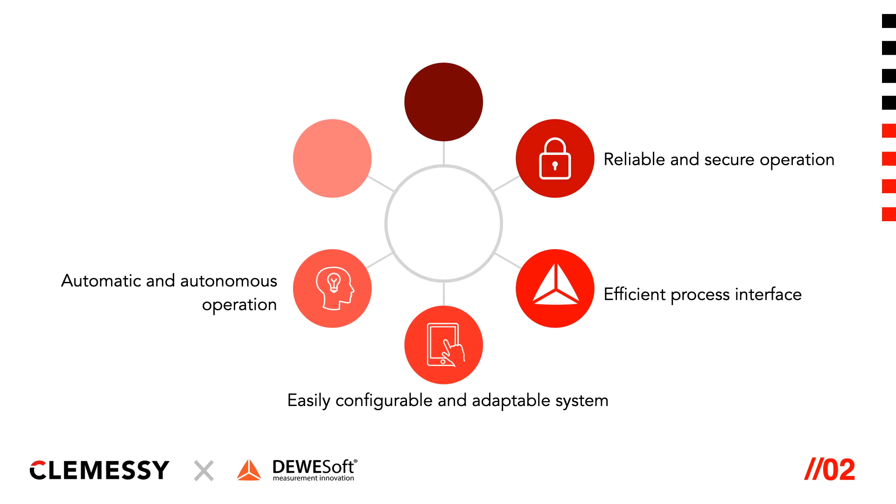Then, you will need an efficient process interface, able to acquire data with fast sampling and fully synchronized. An easily configurable and adaptable system will be the third key point to perfectly fit with the operation you want to perform. In order to limit the risk of error and make the process more reliable, it is essential to have a system capable of operating autonomously and automatically, but with the possibility of manual intervention from the operator.

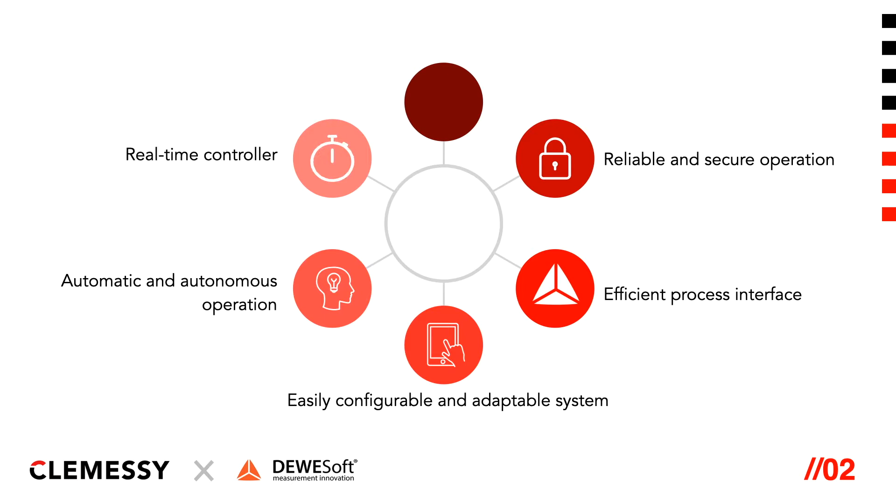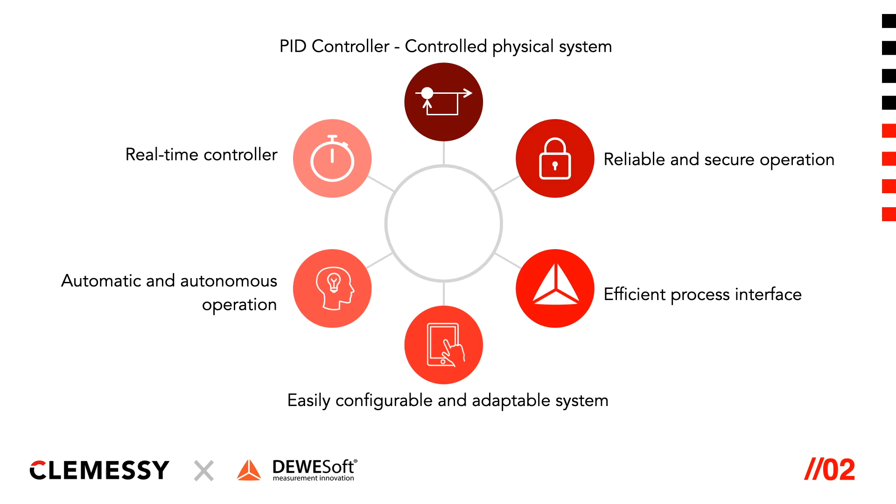The use of a real-time controller is also one of the keys to accuracy, as it ensures the respect of time cycle constraints and the expected accuracy of the process. Finally, at the crossroads with automatic and autonomous operation, we could also implement a real-time PID controller, as it automatically applies accurate and responsive correction to a control function between the set points and the measurements.

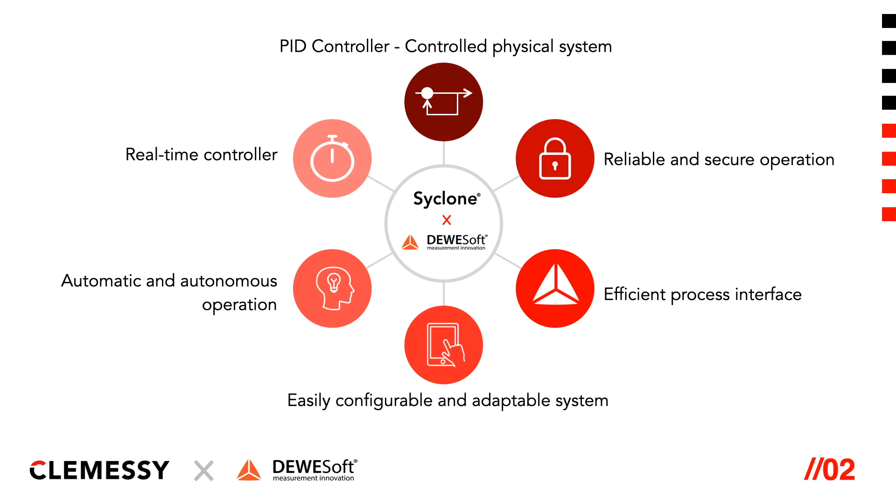All these requirements could be fulfilled with the combination of Syclone and Dewesoft solutions. As you attend this event, you should be familiar with Dewesoft solutions, so I will just give you a quick introduction to Syclone, which is CLEMESSY's supervision solution. This will give you a better understanding of how we combine the world of data acquisition and supervision with Dewesoft.

Syclone allows the supervision of industrial processes. It's an efficient solution for developing control command systems, from industrial automation to control benches for spatial launchers. How do we adapt to these very different needs?

Syclone is a modular software toolbox that allows building a fully customized solution, from simple to the most complex system. It includes human-machine interface, operation sequencer, SCADA, real-time controller, data acquisition, and also a server. Each software module has dedicated functions and can be adapted to specific needs.

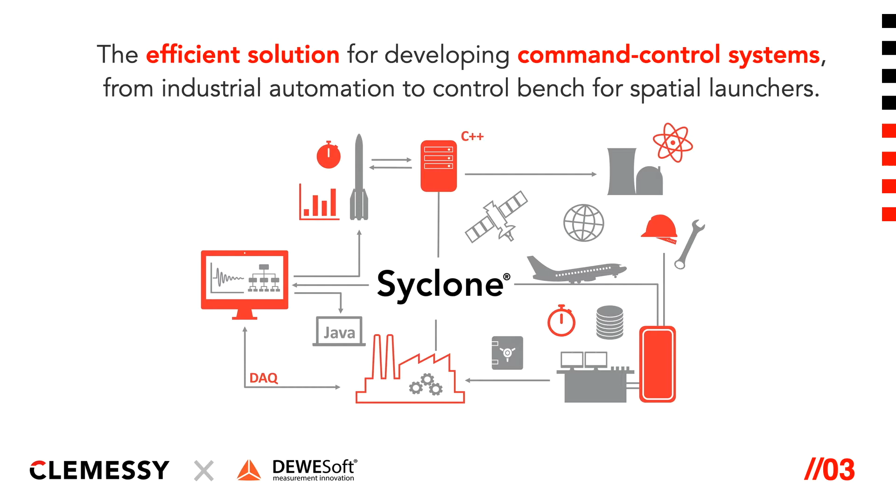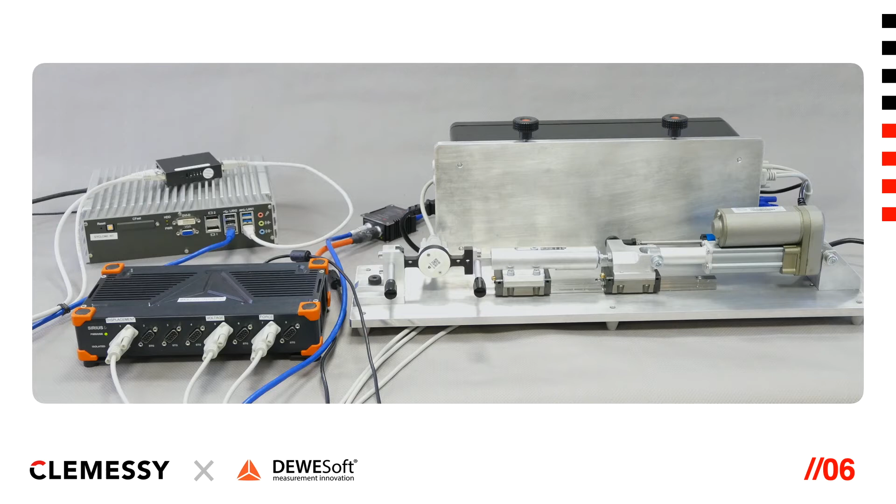Now, let's take the typical example of an industrial electric cylinder to see how incredibly both worlds could fit together. You could see the complete system of this example that is commanding the electrical cylinder on the right side of the picture, and this is its simplified representation. On the right side, that's the world of supervision.

Syclone ensures the interface with the operator and performs the server and real-time sequencer. On the left side, that's the world of data acquisition and process control. Dewesoft equipments are directly interfaced with the process. The originality is that Dewesoft systems are not only used as data acquisition, but also as third-party EtherCAT slaves.

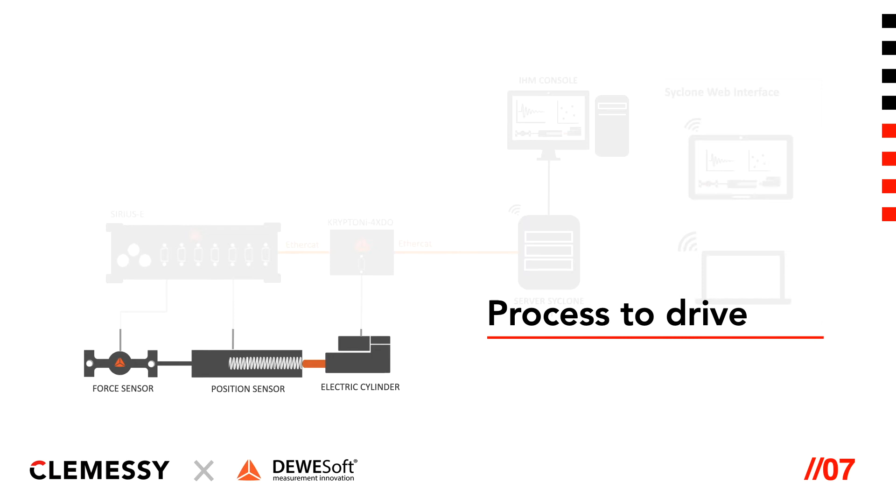If we focus a little bit more on the system, we could find the process to control. It is made of an electric cylinder, a position sensor which will acquire the position of this cylinder, and a force sensor which will acquire the force applied by the cylinder. Both parameters could be used to set up the application and monitor the cylinder.

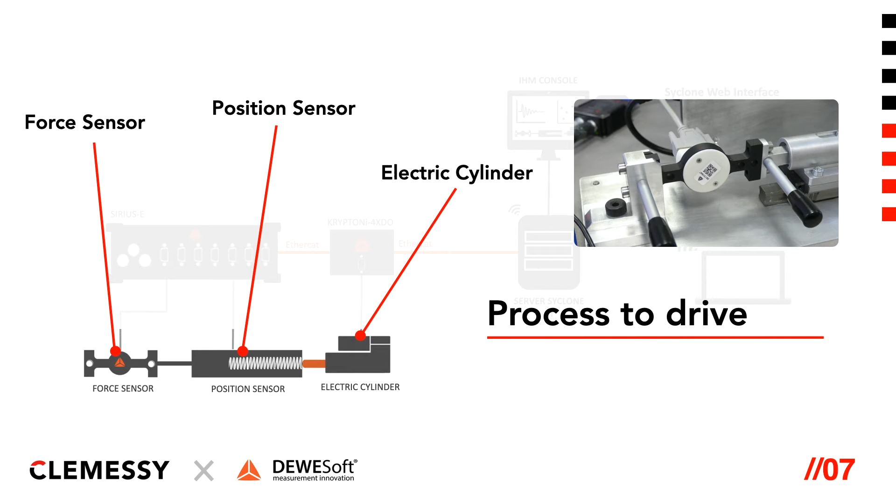We could imagine, for example, that this process could be used in manufacturing to assemble or to constrain different parts of a product. Then you have, of course, the field of acquisition and control system.

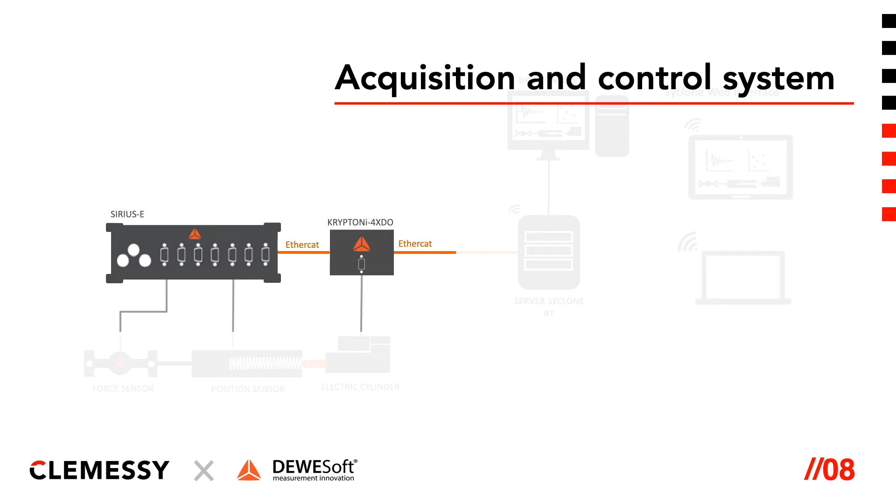We have implemented the Dewesoft frontends that provide the interface between the physical system and the real-time controller. You could find a Sirius for sensor acquisition and a Krypton for cylinder control. This system is connected to the real-time controller through an EtherCAT link to ensure real-time monitoring and operation for a greater precision.

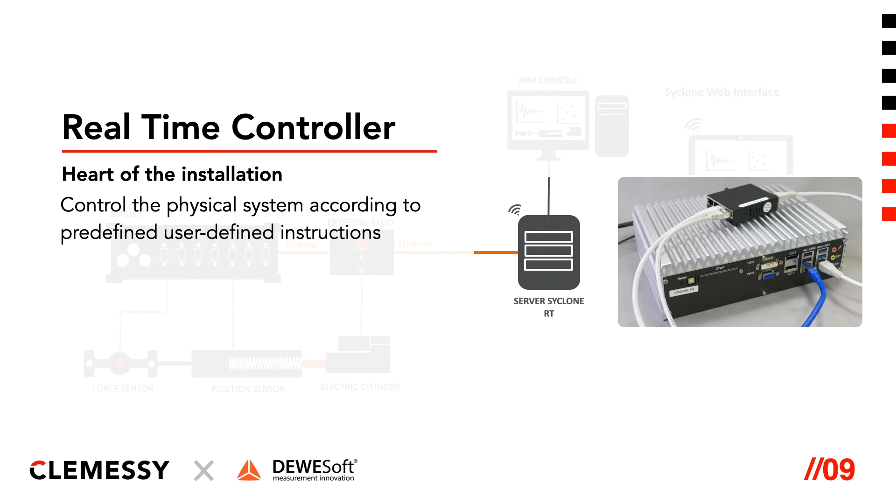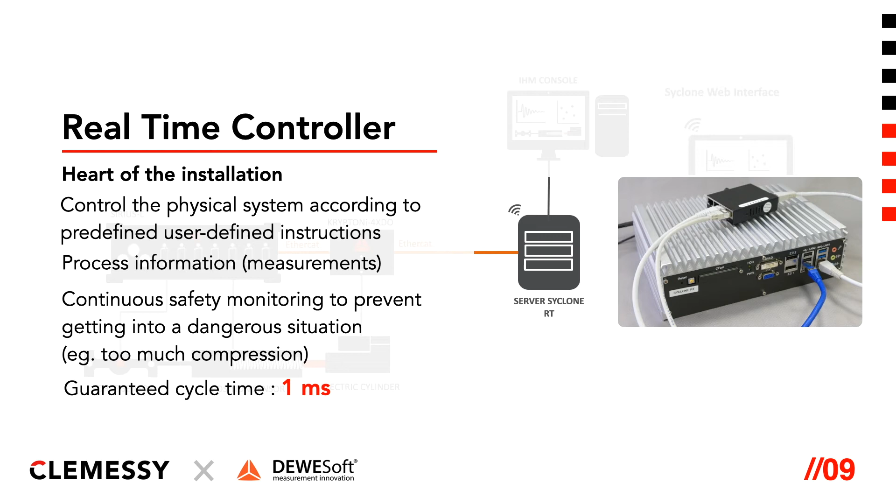It controls the physical system according to predefined user instructions, processes the information and measurements acquired by Dewesoft materials, safely monitors the system autonomously and continuously to prevent dangerous situations, and puts the system in safety mode if needed. The guaranteed cycle time of all this operation is 1 millisecond.

Real-time processing is provided by the combination of a real-time Linux system, RedHawk, and an EtherCAT field network between the real-time controller and the Dewesoft frontends.

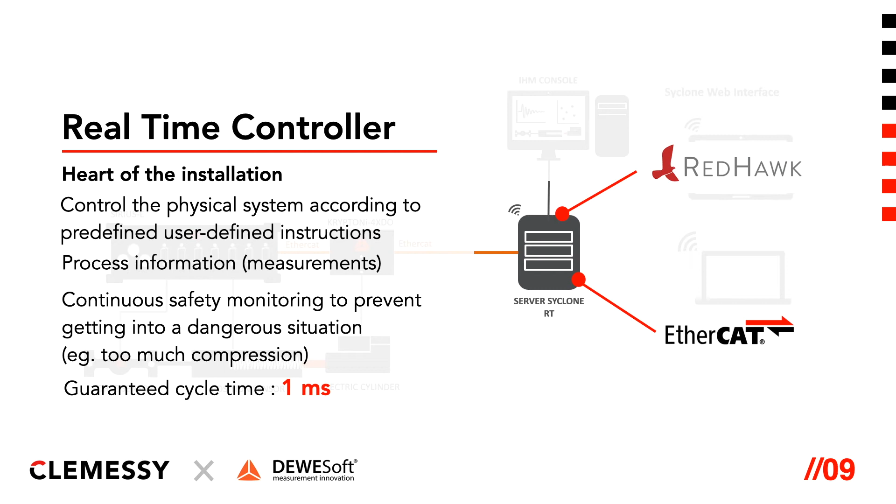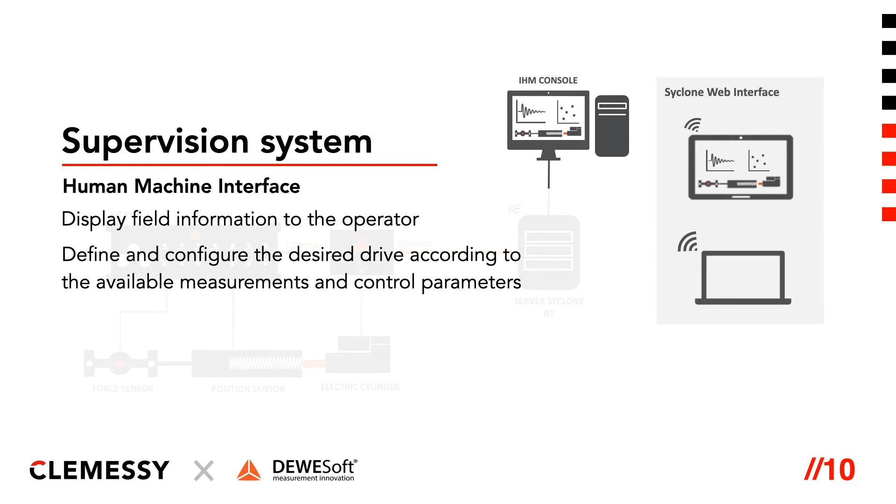Finally, there is the supervision system, or the human-machine interface. Its role is to display field information to the operator on synoptics, to allow the operator to define and configure the desired drive according to the available measurements and control parameters, to take into account changes in the operator's set points, and finally, to allow the operator to perform manual or automatic control of the system.

This supervision system could be fully web-based, using a web browser on a laptop or a mobile tablet. This will allow the operator to be as close as possible to the system. This part is linked with the presentation of my colleague Benjamin about Syclone Web.

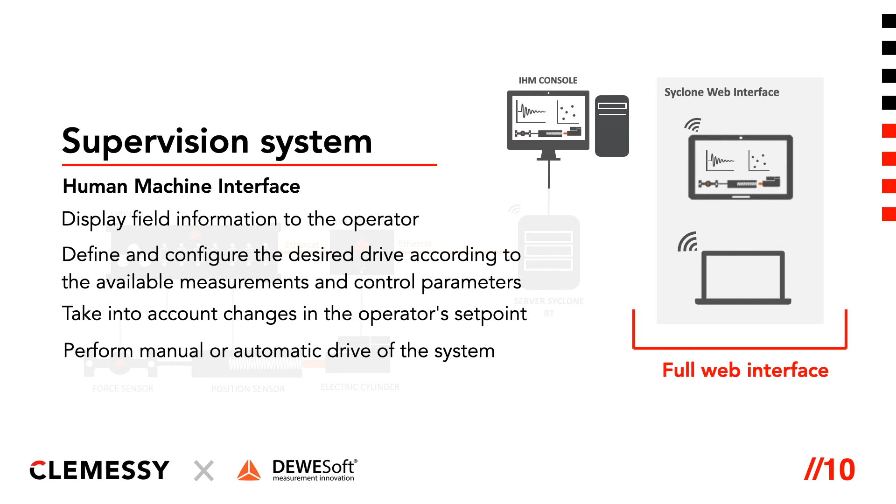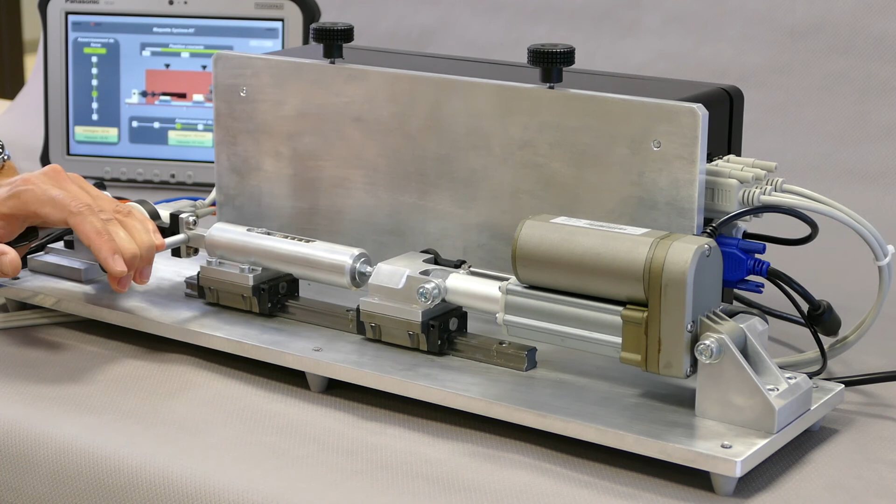Now, you could see an automatic procedure of the cylinder moving between different positions.

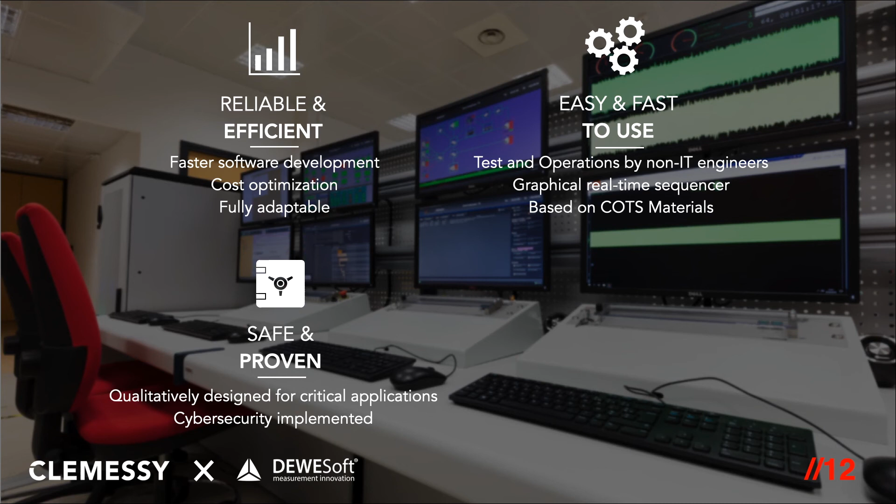If we do a short synthesis of the solution, we could say that it is reliable and efficient, as we have faster software development and cost optimization because we reuse modules and adapt them to the exact specification of the customer. It's also easy and fast to use, as we could set up graphical sequences and automatism to control the system. It's also safe and proven, as Syclone has been designed for critical applications and has cybersecurity implemented. And finally, it has a long service life, as it's independent from OS versions.

If we look together a little further, you may want to know how this solution could meet your needs if they are more complex than the management of a simple electric cylinder. Well, that's a good question. With a similar architecture, but at a larger scale, implementing the Dewesoft acquisition system and Syclone control command solution, you will be able to realize this kind of test bench.